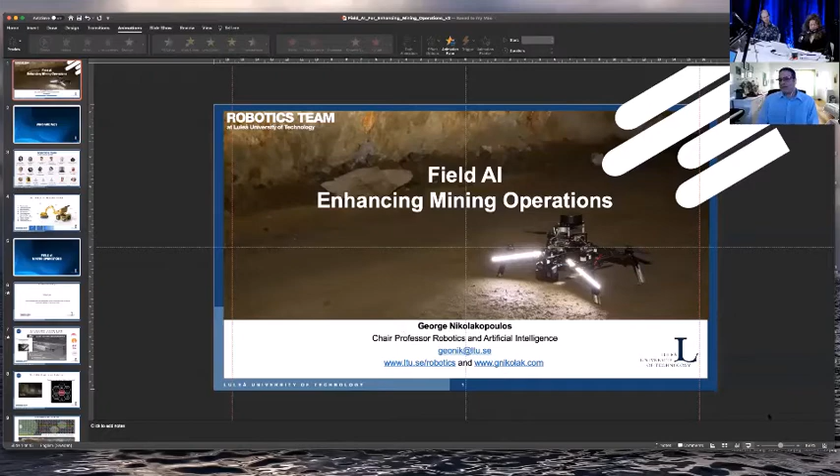Our next speaker is George Nikolakopoulos from Luleå University of Technology. Professor George Nikolakopoulos is the chair of Robotics and Artificial Intelligence at Luleå University of Technology, leading a team of 22 people, all focusing on autonomous robots. His team participates in the DARPA Sub-T Challenge with the JPL NASA team CoSTAR, and in 2020 they won the second stage of this worldwide prestigious competition. The title of George's talk is Field AI Enhancing Mining Operations.

So welcome, George. Thank you. Can you hear me? Can you see me? Can you see my presentation? Yeah, yes, okay. So I am Robot George, to couple my presentation to the previous one. Thank you for the introduction.

So I will jump immediately to the subject. We are a bunch of people, I think we became 23, all working in the area of field robotics, as we say. So what we are trying to do here is to take the robots from the lab and place them in real operating conditions, for example, in a mine, a construction site, in space.

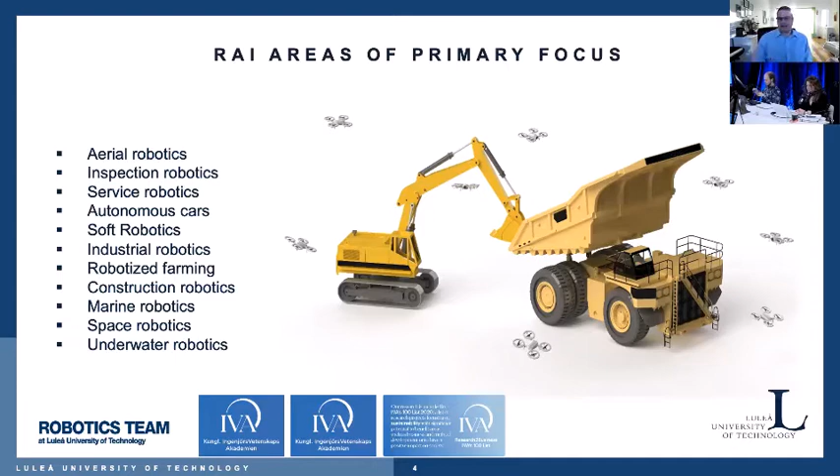So we are focusing on almost all the aspects of robots that have to do with infrastructure, with human activities, with classical examples being aerial robotics, autonomous cars, soft robotics, space robotics, underwater robotics, just to name a few. And because we are operating at high TRL levels, because as I said, we want to place our robots outside the laboratory in the real field, we have been listed three times in a row by IVA, based on our autonomy technology for drones, as among the most influencing technologies, I think, at the national level in Sweden.

Except from that, now I will start talking about AI, field AI, as I usually say, in mining operations. And I will present in short some of our activities over the last decade, almost.

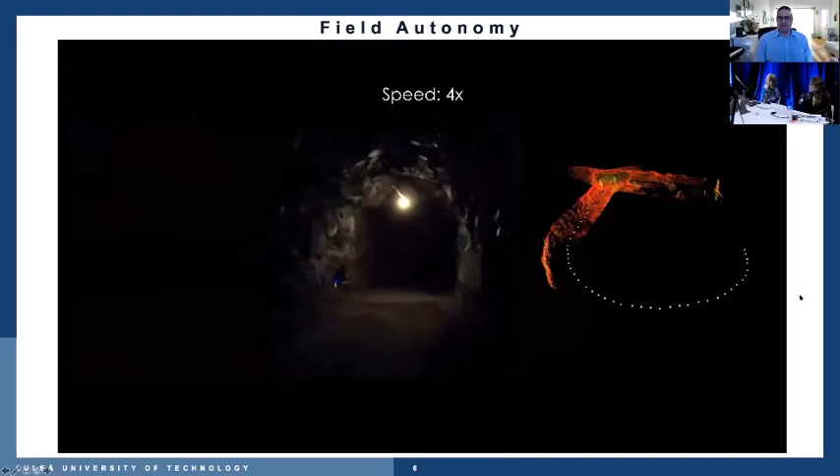Okay, I started working with the field of drones maybe 15 years ago. Now it is a very common subject, but yes, I think many of you have seen videos from me or from other scientists or engineers. Many mining companies are also hiring services like the one that you see.

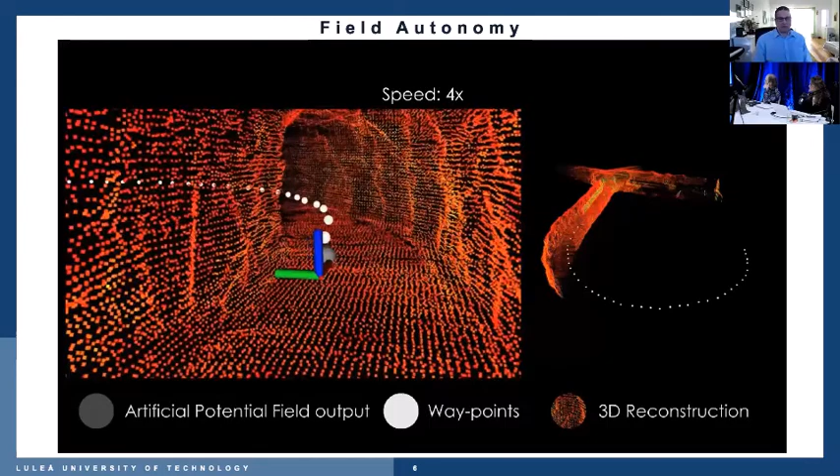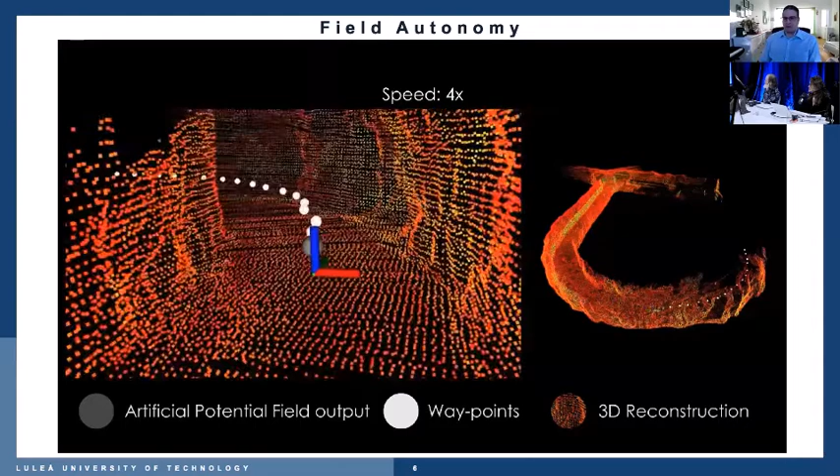So here I'm showing a fully autonomous drone operating in a mine exploration or tunnel exploration mission, where you see that the robot decides itself where to fly, how to avoid the walls, how to create the 3D reconstruction of the environment. So this is where the AI is hidden. The fact that it's an aerial vehicle doesn't matter in this case - the AI that I'm talking about is platform agnostic. So in this case, it's applied to an aerial vehicle.

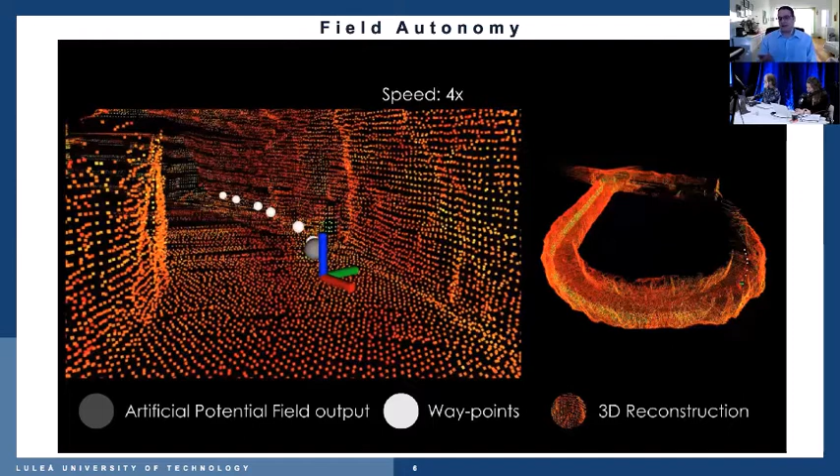It's more difficult to control a vehicle like that than a mining machine, for example. The size might confuse us—we think that because it's larger, it's more difficult to control, but fortunately it's not like this. With drones, we're doing a lot of work to demonstrate how capable our technologies are, working on an aerial platform that is inherently unstable. It means if something goes wrong, it will fall down. It will work for ground vehicles as well.

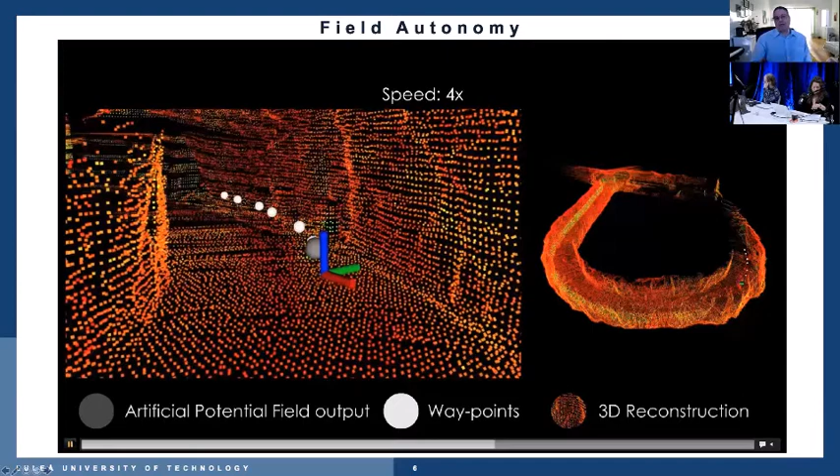This is an example of embedding AI in the device. You don't see the AI there—you see only the outcome. All the perception of the environment, the reasoning, the learning are mathematics embedded on the machine. So this is a scenario where the drone or vehicle is fully autonomously navigating through a bunch of obstacles and goes through them to continue the mission.

This is something we call reactive navigation. It means we embed in the machines the proper AI to understand the environment and take decisions in cases that have not been programmed before. So if you have a fully autonomous carrying line with wheel loaders, for example, and something happens, the robot needs the proper AI to do the proper reconfiguration. This is the classical focus in robotics over the last years.

Now I will start showing you the future, what the robotic community is working on. As mentioned in my introduction, we are participating in the DARPA Subterranean Challenge, which we won last year—we won the second phase. The last phase is coming in September, so let's see what will happen. This challenge is changing the way robots are penetrating human society, every 10 years. The last DARPA challenge was about autonomous cars.

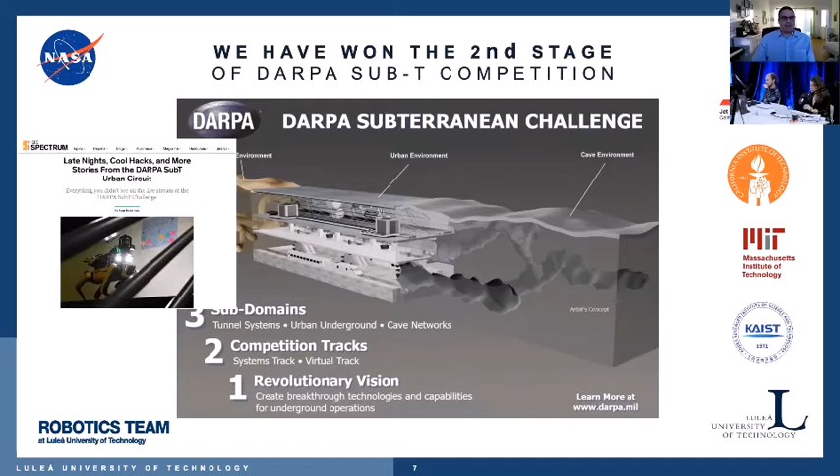What we're developing here is Nebula, the Nebula autonomy. We pass from classical development of algorithms, for example for navigation, to a more integrated approach. For this scenario, we're focusing not on the autonomy of each robot, but building multiple components to orchestrate the operation of multiple robots.

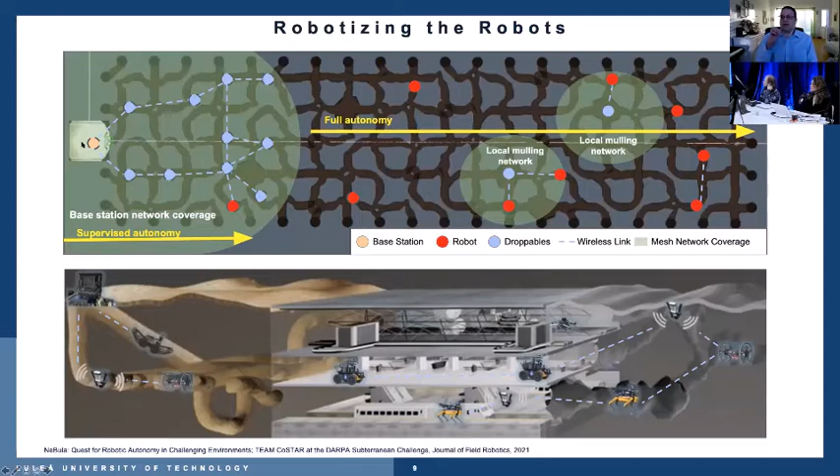I'm showing you some concepts we recently published in the Journal of Field Robotics. You see a mining environment with tunnels, and robots thrown inside at the same time to perform the exploration task while being controlled. When I say controlled, I mean high level—you just give a mission, and then the robots reconfigure their scenario, their mission, and their response.

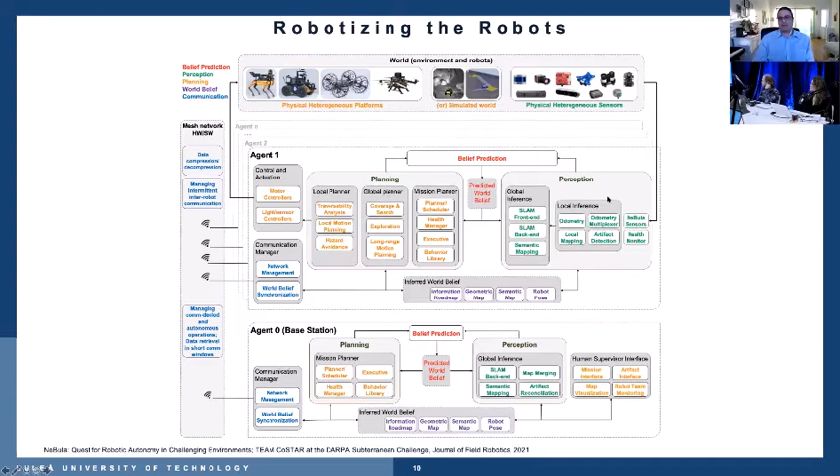What we're developing now, borrowing architecture we use in the NASA team, is that instead of focusing only on one block—like local motion planning or perception for one module—we build an AI software architecture with extreme capabilities to push vehicles, any kind, ground or aerial, to levels of autonomy, perception, and decision never reached before. This picture shows the complexity of all these components that need to work together, and we're doing this not for one agent, but for multiple agents. Here you see an example of reactive navigation, as I was saying before.

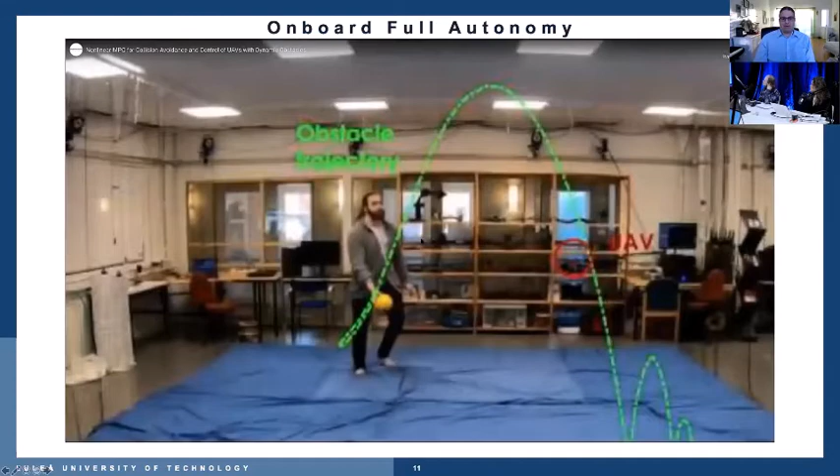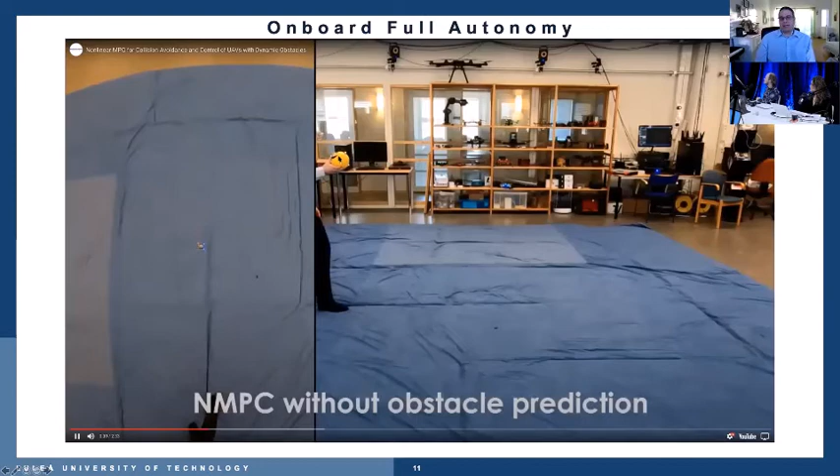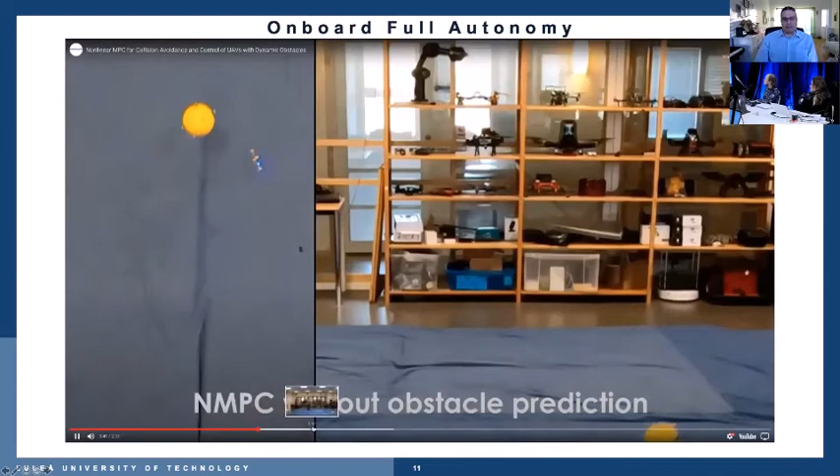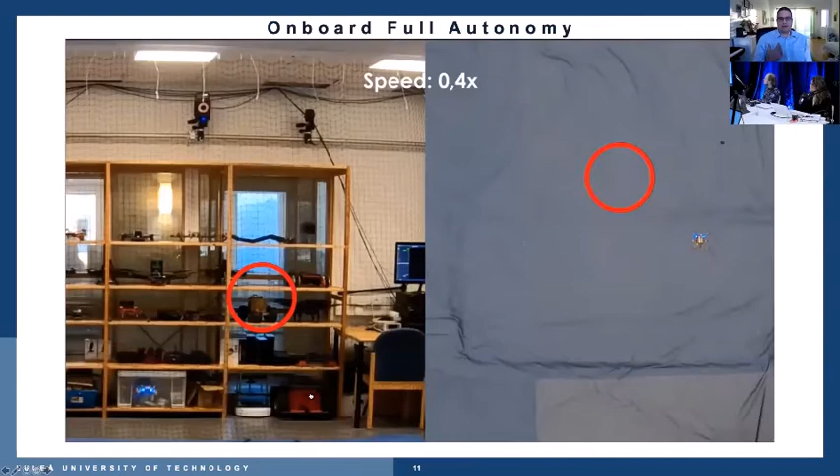The classical approach is that if somebody is throwing the ball, based on for example artificial potential fields, a method to detect obstacles, the robot is not capable to predict where the ball will go and if it will hit it. But if we add components of AI on top of that, the robot will have the capacity to start predicting where the ball is going and take immediate action before the ball hits it. So this is all about reactive navigation.

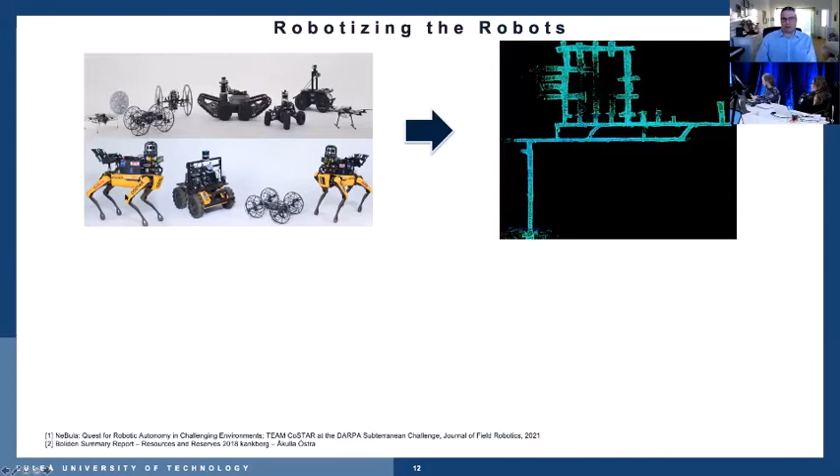The robot takes decisions before the event happens. What we are doing, and what we will see in the next years, is the results of the Subterranean challenge from multiple robots. In our team we have two Spots from Boston Dynamics, one Husky, and one Rollocopter, operating in environments that look like mining tunnels. This is equivalent to having multiple mining machines, and many actions now are focusing on automating the mining machine in similar mining environments. I'm borrowing these two images from a report from Boliden.

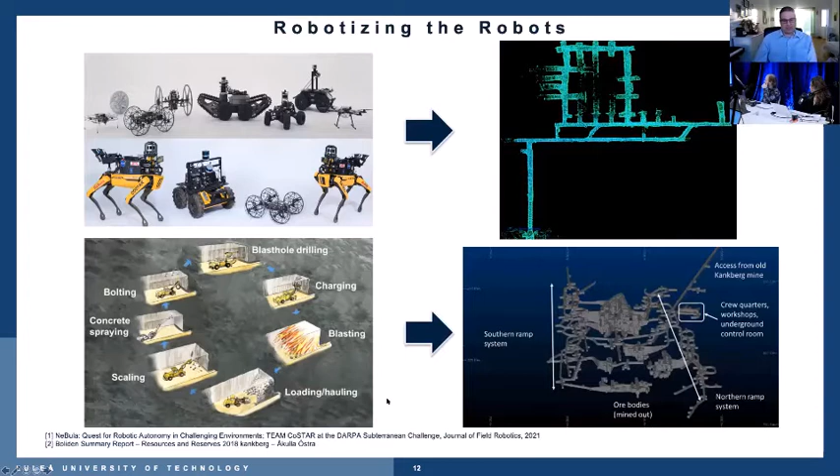So this is the future in mining. I want to give you an example, and I'll finish my presentation in 1-2 minutes. This is an example from the competition where we have multiple robots doing, for example, drifting or a 3D detailed scanning of the environment. Then we use some mathematics, AI as it's called nowadays, to do this stitching of the infrastructure together. It's an amazing result that gives other dimensions in autonomy in mining.

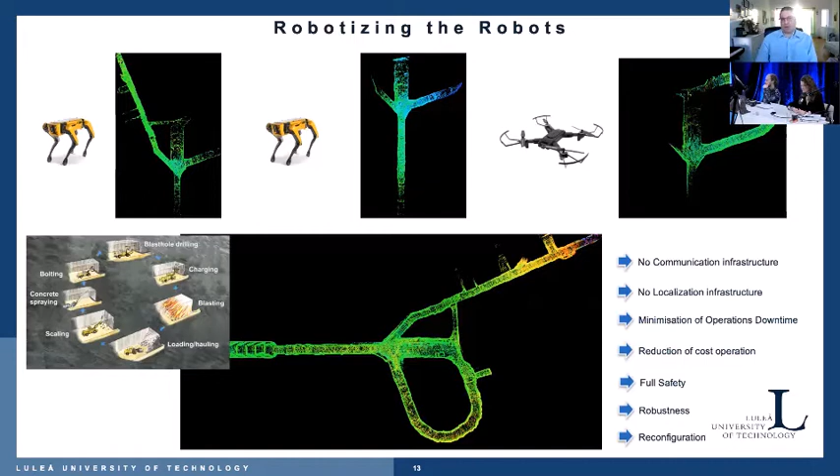You should always remember this setup, because this is the next step. All this technology can lead to applying robots in situations where we don't need any more communication infrastructure as we're doing now. We don't need any localization infrastructure as we're doing now. The robots can operate in unstructured, unknown environments. We have the tools to minimize operating downtimes, increase productivity, reduce costs, and we're talking about fully safe operations with robustness and reconfiguration in unexpected, unknown situations.

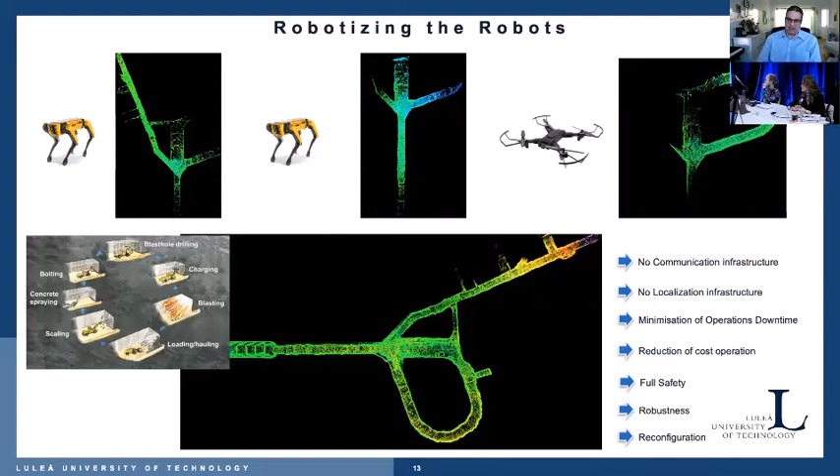That's the last slide. It's about creating a virtual mine - not graphics, not AR or VR, but a mining environment that can be a full test bed for deploying these robots and doing very realistic scenarios. I'm over time, so I will finish here.

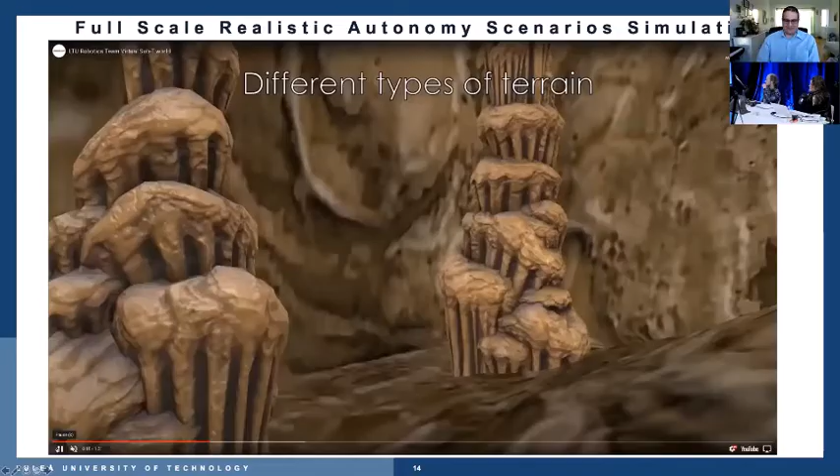I think my slides will be also shared with you. Sorry about that. Yes. But you will also be with us at the panel discussion at the end. Yeah, great. Yes.

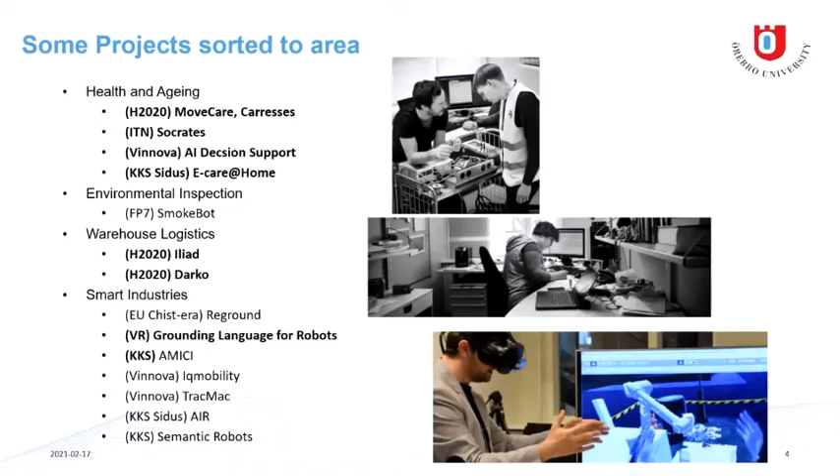If I would somehow characterize our collaboration, it's that we've had several years of experience moving from what we call basic research to application and then really testing it. So we really like collaborating with different actors, both in our region, in our nation, but also very much around the world. I want to lift how we work, because for those of you who maybe feel a bit unsure about what's happening AI-wise in Sweden, there is in fact an ecosystem in Sweden regarding AI. We have WASP, which is the Wallenberg initiative that is focusing a lot on basic research.

We heard from Daniel earlier today about implementation and how you can actually apply AI. We also have a lot of initiatives around education, like AI competence, looking at lifelong learning, and we try to mirror that ecosystem. So if you're interested in working on AI projects, contact the university and we can link you to what's happening nationwide. So let's go to some concrete projects.

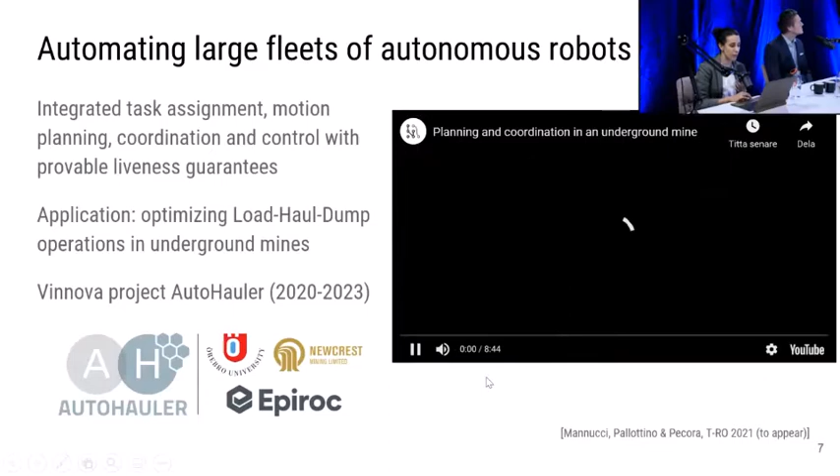This is one particular project that's not so unsimilar from something George mentioned earlier, being driven by two of our researchers, Dr. Pecora and his postdoc, who are looking at not only the individual autonomous system or robot, but how a fleet of autonomous robots can coordinate their actions.

You can look again at this video, basically showing a simulation of coordinating actions between 20 different robots. But these kinds of algorithms are taken forth very much in collaboration with our industrial partners, Epiroc. And in fact, when I came here, Ulla said, hey, that's my video. And that's really good, because that's what we want to do. I think this particular collaboration led to more opportunities for Epiroc.

And there is a company here called Newcrest Mining Limited, an Australian company that was very much attracted to Sweden because of the work done by the researchers.

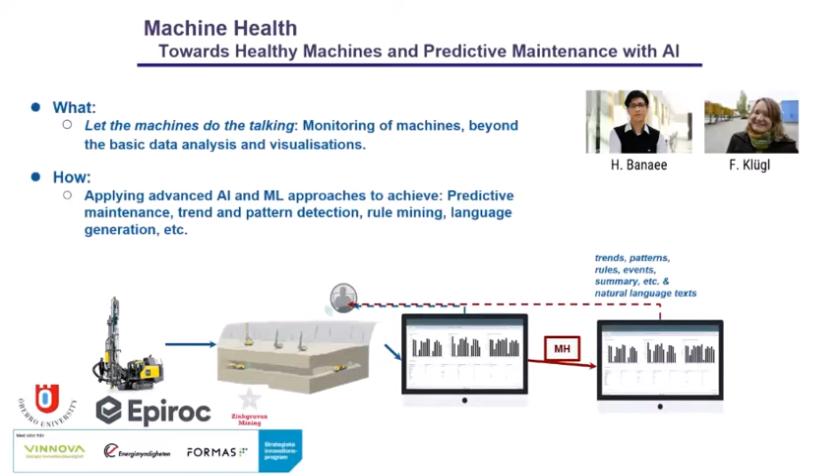Moving on, we talked a lot about robots, but we also look at cases where we don't have robots. This is a project looking at predictive maintenance and monitoring a lot of data. We have a lot of tools to visualize data, but Frederick talked about natural language, and one of the things we looked at was whether we can get an AI to explain very complicated trends in simple natural language by looking at monitoring tools provided by Epiroc, revealing patterns that might not be seen by the naked human eye.

And this is also very good for their customers like Zinkgruvan Mining, who may look at this and then realize how they need to improve the usage of the actual machines.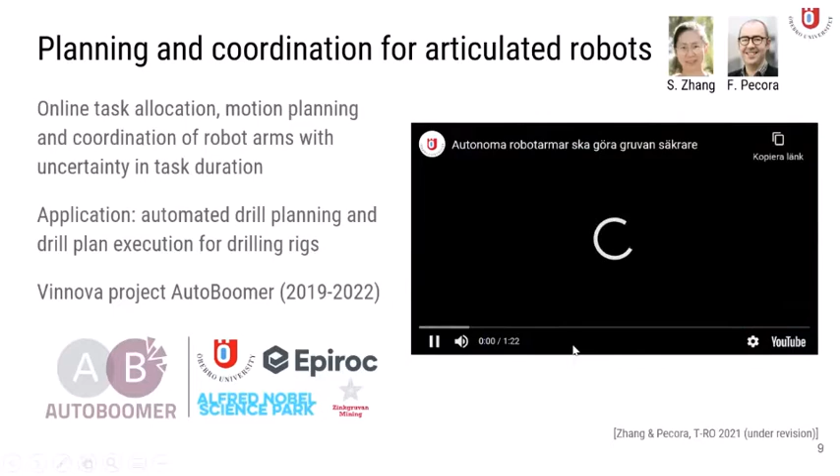Switch off the sound here. You can read hopefully the subtitles.

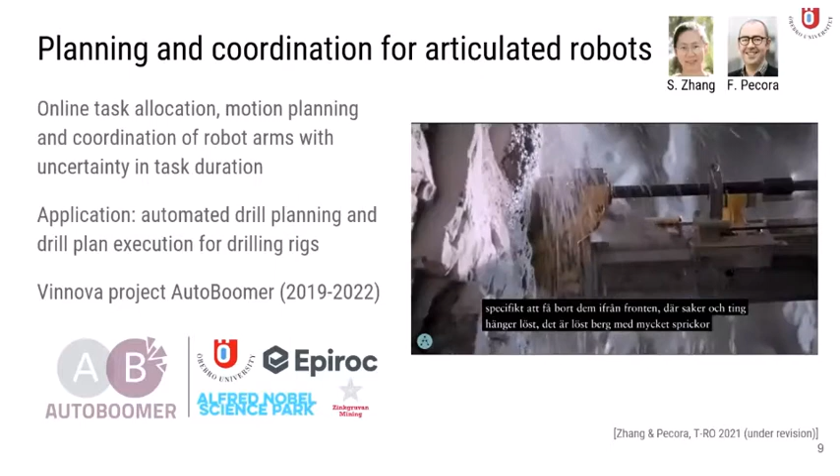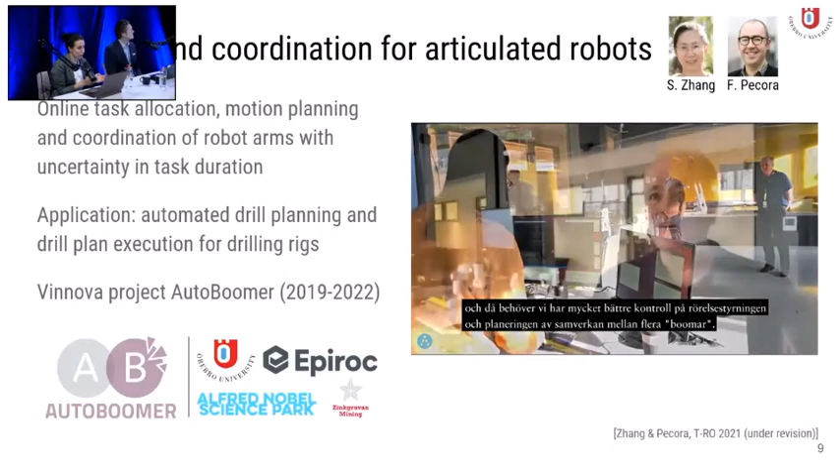What I want to lift here is that this is a particular case where one had the idea of coordinating different robot arms. So here you have different robot arms that should coordinate their actions between them.

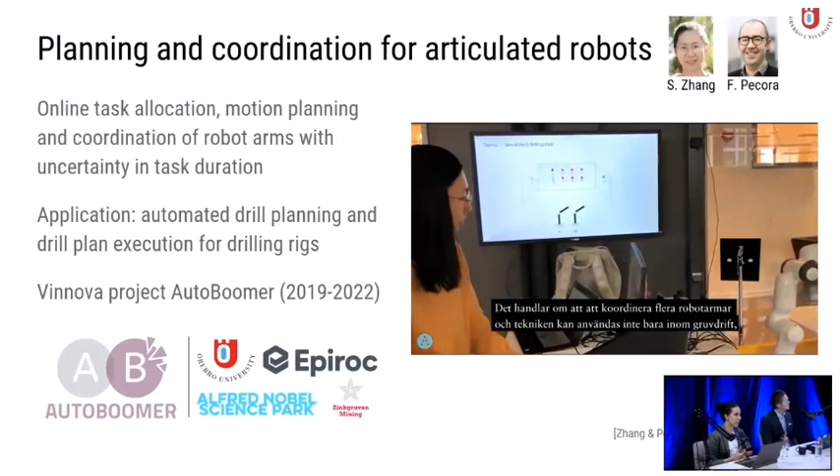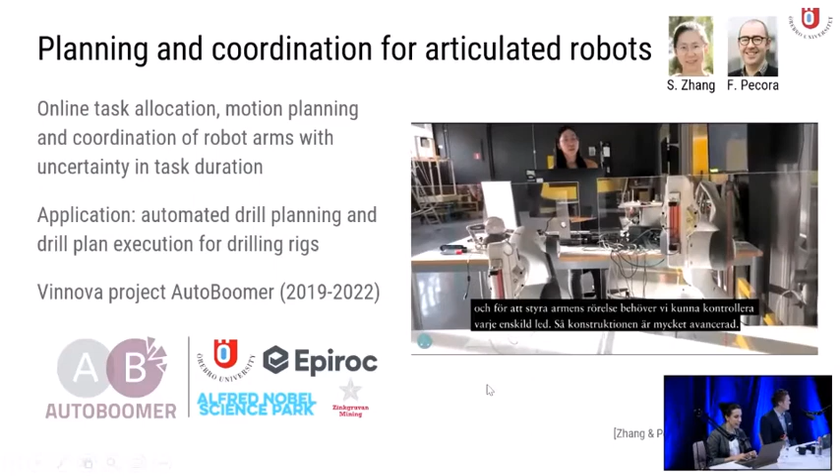But again, what I want to lift is that we have these labs and demonstrator environments at the university where we test our solutions together with the companies and researchers. So we want to move away slowly from these lab environments to the real environment, but these environments are very important for taking those steps. And again, this is a research project also led by Dr. Pecora.

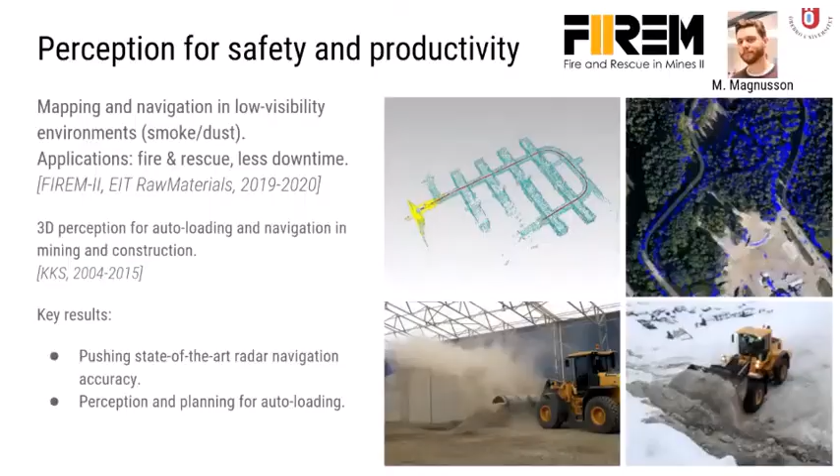Then we have a very interesting area dealing more on the side of perception. How do we measure information inside a mining environment? One specialty we have in our research center is perception, in particular perception when you have very low visibility environments. We also have researchers looking at perception of different types of entities, not just visual entities, but gas, for example. There's been a number of projects examining how you can increase the perceptual abilities of these autonomous systems.

And here we've had one researcher who's worked together with several others, Martin Magnusson, who's looked at examples of how you can create a good representation of the environment, even though you have low visibility.

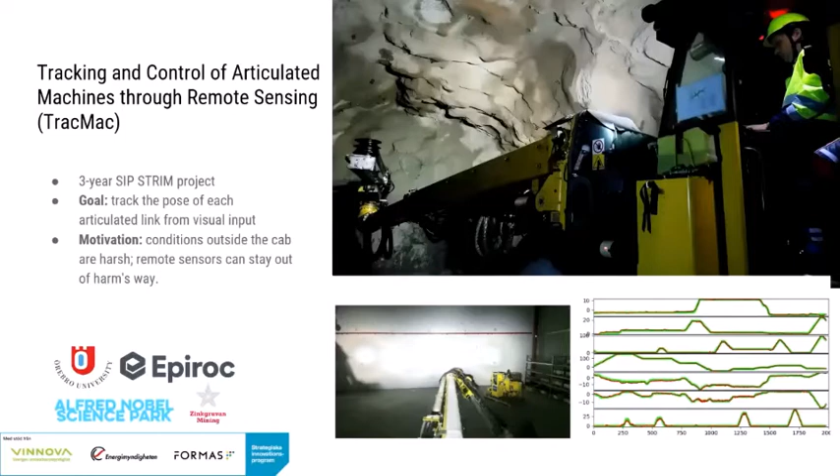And this last one, again, I just want to tease your appetite somewhat. This particular project, led by Dr. Stoyanov at the university, looks at how you can use sensors to track the pose of these articulated links that you have, for example, on these larger machines, and then give information to the operator or plan certain tasks so that you keep the operator as safe as possible.

As I said before, developing AI and robotics that work with and for humans is something we really want to push, and we want to do this very much in collaboration with as many people as possible. So my last message is that if you're curious about what AI can do, what autonomous systems can do in the mining field, you're welcome to reach out to us.

We have many ways into the university, and Lotta, you're one of them. Yeah, we're really happy to be part of the Swedish Mining Innovation and have a look at how we can transfer the knowledge that's being produced here. Thank you. Great, thank you.

Here we can see the technical development in chronological order at LKAB with respect to automation. Around the 1950s, the haulage went automated. Then the train haulage went automated. Then we turned to remote control the rail switches for the railway system in the mine. Then automated trains around the 1970s. At the end of the 1970s, we had the first fully controlled pelletization plant.

Then during the 1990s, a system for real-time information was introduced to monitor and collect data from the mine and the plants. At the end of the 1990s, LKAB tried a fully automated loading system. Then we introduced remote control rock breakers in production areas.

In the decade of 2010-2020, an extensive wireless network was introduced in the mines, both Kiruna mine and Malmberget mine, with more than 3,700 Wi-Fi access points. That means both entire mines had Wi-Fi access. Then the engineers could gather data, inspect areas when the machines were in operation, and assess in real time cases related to production and other operations in the mines.

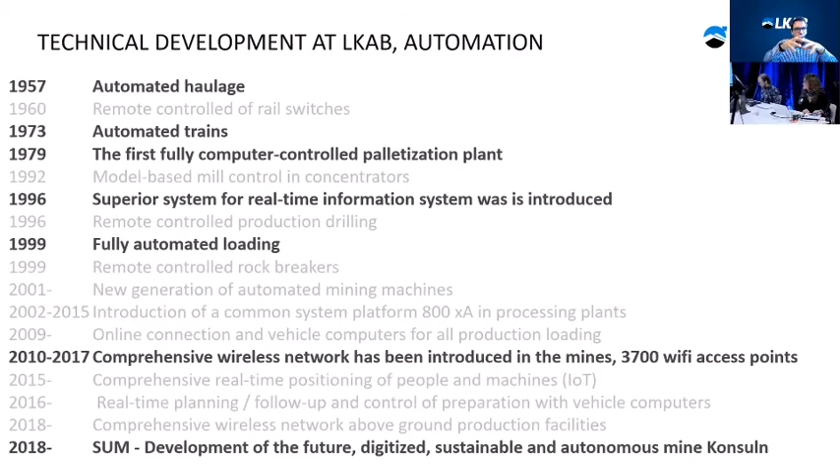Today's practices are much safer and much higher efficiency. We use much safer and more efficient equipment, and the work changed from heavily manual work into heavily mechanized work. Our operators are located in safe locations, with remote control machines.

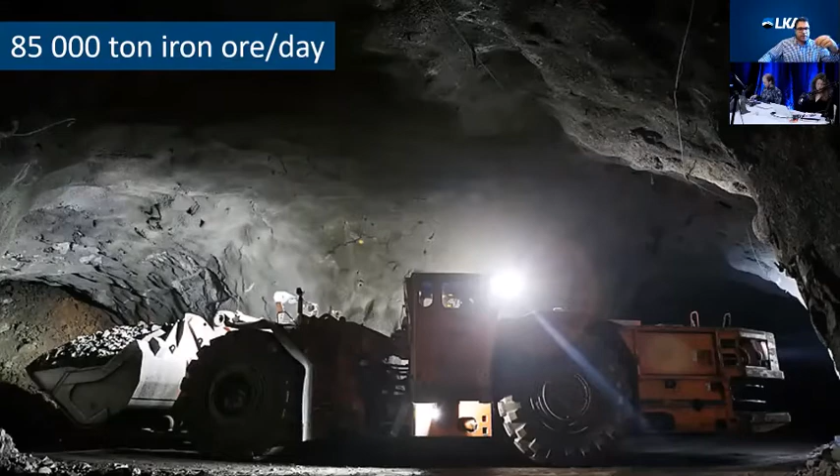Drilling machines, for example, as we can see in this picture, and also some machines used for production - the loaders. If you compare that machine with the previous one, it's much safer and bigger, giving higher productivity, and the cross-cut areas and the mine grow larger. Today our production is 85,000 tons of iron ore per day. The final product, the steel that is produced, is equivalent to 3 Eiffel Towers a day.

Then tomorrow - the concepts of tomorrow, of course, AI is involved, together with AI, data, and automation. That means we have 3 cores of digitalization. First is to inspect, to gather information about the existing conditions in the mines, then to plan, and then to give the order to the machine to perform a task. Of course, all these pillars exchange information with each other, and advanced, sophisticated algorithms can learn and optimize the process, making it safer and more efficient.

Here, the inspection can be done by means of various vehicles, aerial or ground vehicles—for example, fully automated drones or ground robots. Spot can be one of them, or a combination of these two machines in areas where robots cannot go because of mud or water. Then the drone can be deployed to further investigate the area.

Here we can see the progress in the SUM project over the last 10 years and forth until 2030. At the beginning, we had isolated systems that didn't talk to each other. Then we jumped into connected operations, where we installed Wi-Fi points and started gathering data in real time. Then we went to integrated operations, where we could run remote diagnostics and see the condition of machines in real time. The way forward is remote control, remote operations, prescriptive maintenance and analytics, real-time information. So less and less people will be exposed to mining conditions, with intelligent systems and electric ships.

Finally, the vision is to have autonomous operations where systems will communicate with each other, exchange information, and take decisions for much safer and more efficient mining operations.

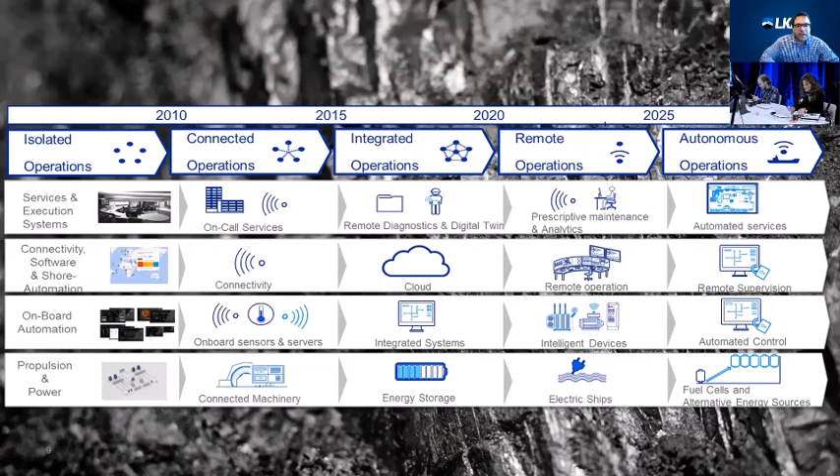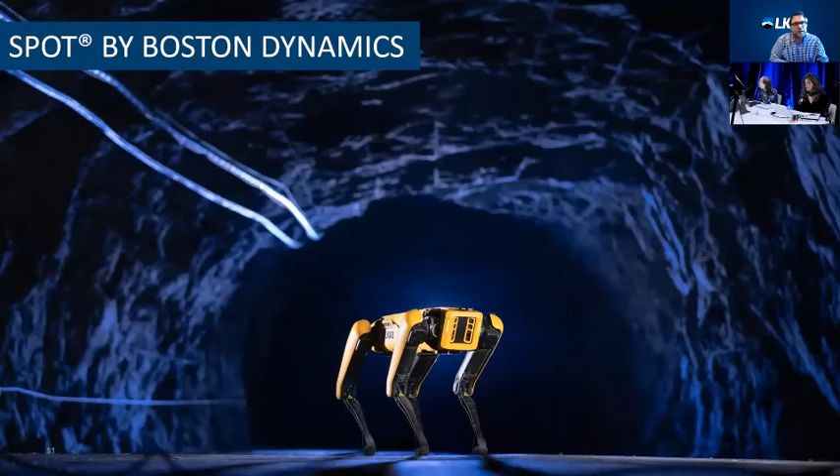Recently we have been working with Spot, a dog-like robot by Boston Dynamics. LKAB right now has two Spots for testing the suitability of these robots in mining conditions, because there is dust and humidity in the air, and we know electronics are a bit sensitive to these conditions.

These robots can be used for different purposes—for example, to inspect areas or scan areas after a production blast, to measure the gases of an area after a blast. In case of a fire, these robots can be equipped with a rescue payload, approach the area, and give engineers a real-time perspective of what's going on, so people can take decisions based on given information and not assumptions.

Spot by itself understands its surrounding environment and adapts to it. It understands if it's slippery, muddy, if there's water, and even if there's low light intensity, Spot can operate. Of course, Spot can be programmed to explore an area of the mine or perform a task during the quiet hours of the mine.

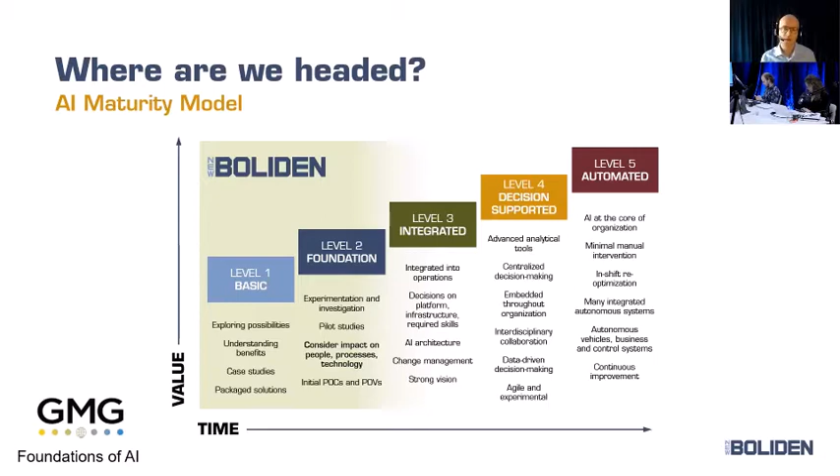We have also done quite a few case studies, sometimes with packaged solutions where a third party or supplier provided an AI solution for a specific application. These case studies involved some predictive maintenance, but one of the more successful studies was trying to predict disturbances in the process, where we showed we could predict disturbances up to two hours before they happen using AI technologies. This could be very beneficial, giving operators ample time to take preventive actions and hopefully avoid an accident or a discharge into the environment.

At level 2, the foundation stage, we see more experimentation and more thorough investigation into what needs to be done, along with pilot studies on real projects that will eventually become implementations — that's where we're doing a lot of work now, considering impact on people, processes, and technology. I was hoping to be able to check that box after this talk, because that's exactly what I'm doing right now, so maybe we could take this step here and now.

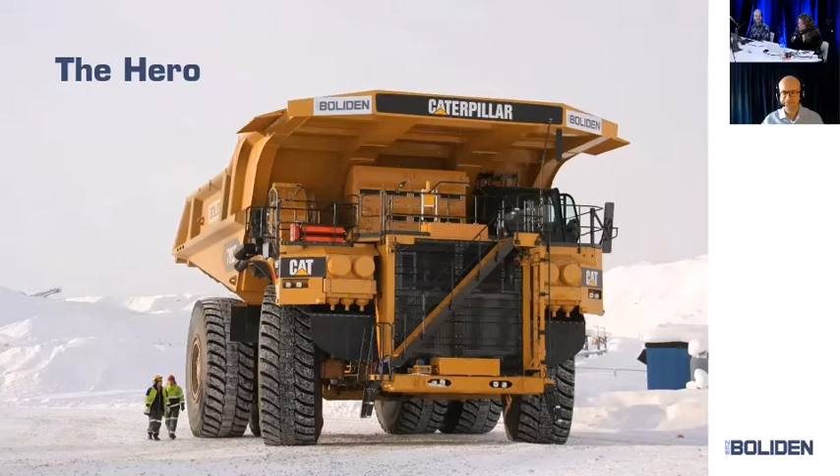Our next speakers are from the Chilean mining company Codelco. Leonardo Angelucci and Alberto Laudadio will be with us and tell us a little bit about how Codelco is seeing AI and a short summary of what they are doing today in this field.

Hi, hello. My name is Alberto Laudadio, and I'm glad to be part of this webinar. Thanks for having us. I'm data manager at the National Copper Corporation of Chile, as part of the advanced analytics team in the VP of Technology. I'm mainly in charge of our data lake and corporate data governance, working with the data architect and our team of data engineers and the data governance leader.

Here with me is Leonardo Angelucci, who is Agile Manager in the same Advanced Analytics team. Leonardo is in charge of the implementation of the Advanced Analytics Initiative and the Data Scientist teams. I'll be telling you about the purpose of our team and the key elements we rely on to achieve our goals. And Leonardo will be telling you about how we are doing the project and what are our next steps.

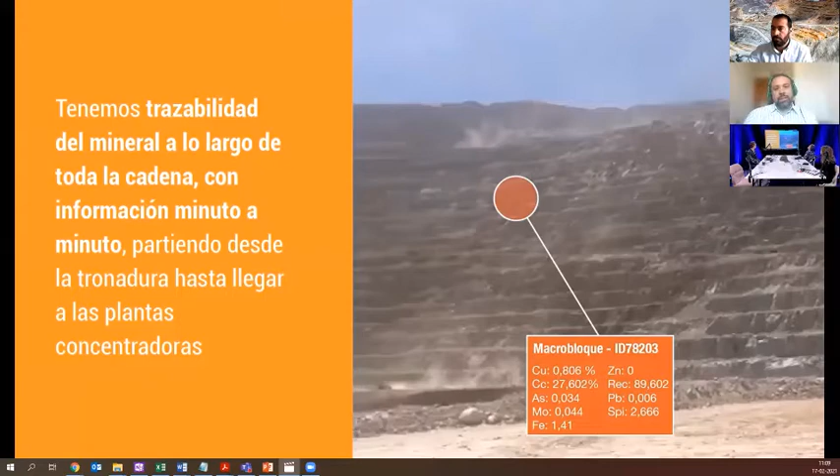The first project I want to mention is named MINCO, it's Mine to Concentrator in our Chuquicamata division. The scope is to maximize the copper output with one particularity: we are selecting the optimal mineral combination, which you may know as blend or blending. We do that with three different sources: the open pit in Chuquicamata, the underground mine in Chuquicamata, and mineral from another northern Codelco division named Radomiro Tomic.

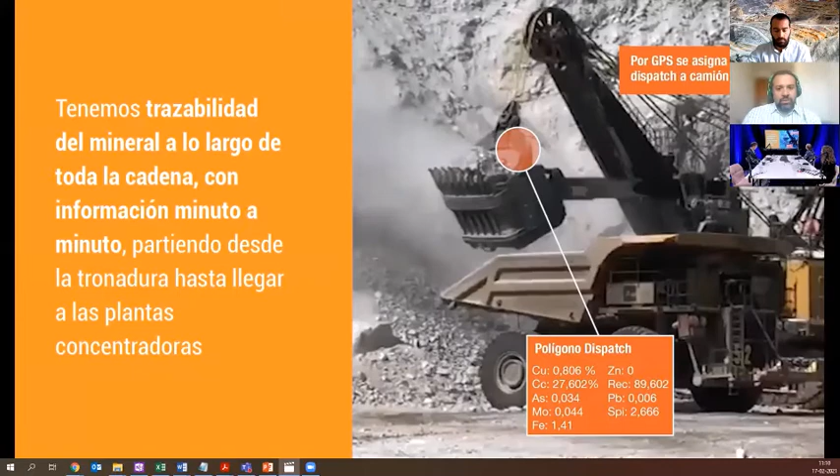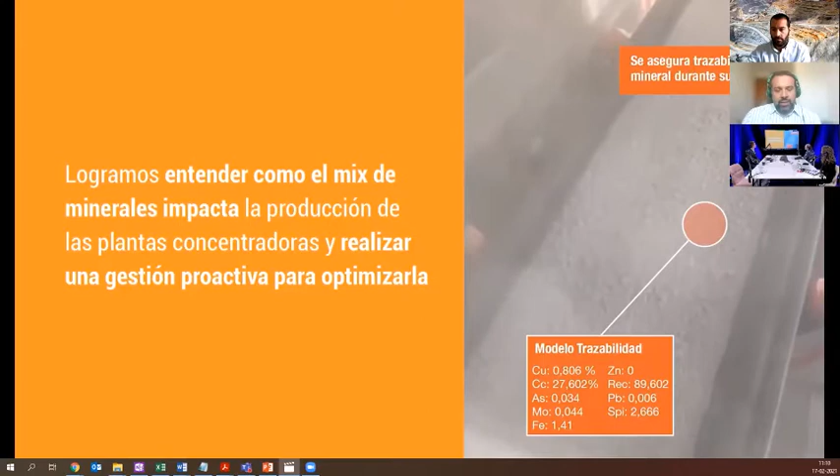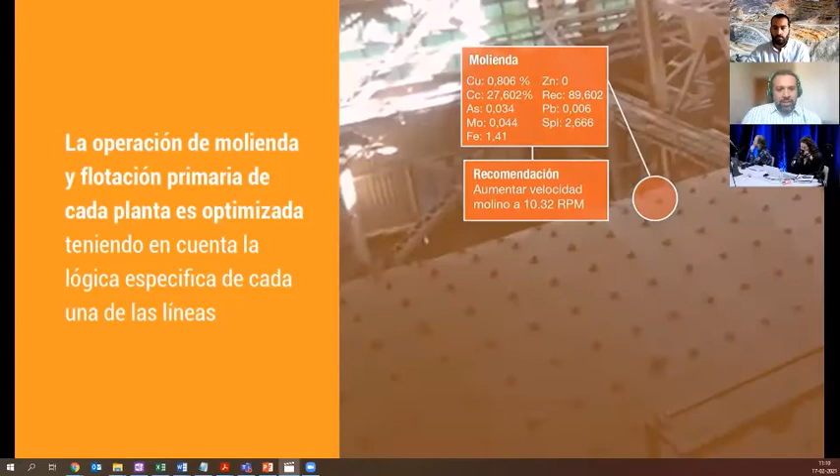We define this optimal combination based on the current division concentrator context and actual configuration. I mean we are talking about the line with the SAG mills, the grinding mills, the rougher flotation. Despite modeling each process separately, the main objective to maximize the copper output works as one big process coordinated between all these small pieces of our production line.

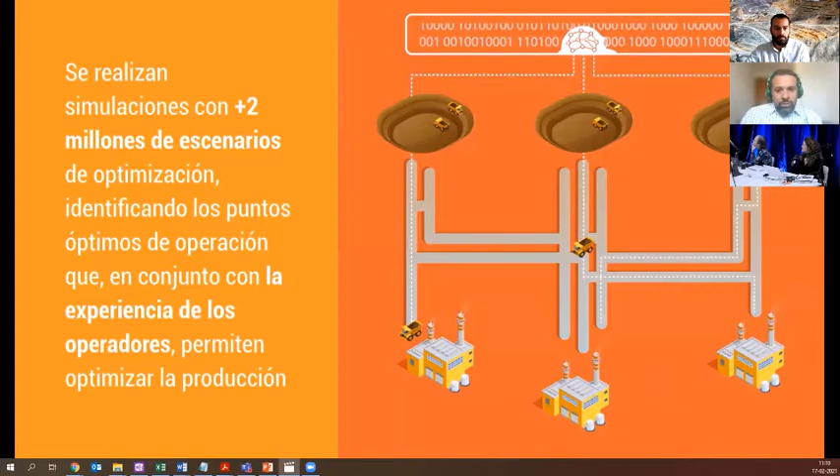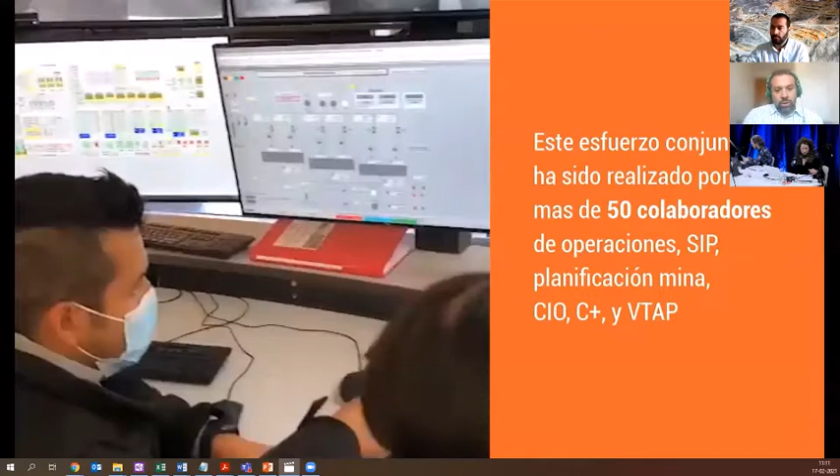What we do in concrete is create a recommendation system for the operators in the central control room, where the remote operation is, always with focus on giving the operator a few modifications in the control variable limits. This is our core in this project, all based in advanced analytics and machine learning models.

I want to give you a few highlights about this project. This is our top value project in our portfolio, and we expect a big value at the end of the road. The project execution is based on the Scrum Agile framework, and the continuous operation is based on a traditional Kanban framework, with defined stations, very traditional Kanban.

One very important thing to mention: we never work alone. We always work with the operational experts of the division. We have a mixed team; in fact, our product owner is a process expert in this project. As the analytics team, we provide the data scientist, the data engineer, the scrum master, the full stack developers—all the technical hands for the project.

Another highlight of the project is that it's 100% cloud-based. As Alberto said, we have data in near real time from the sensor tags. All of our machine learning models are executed in our cloud environment, and the recommendation system and KPI reports are mounted in the cloud too.

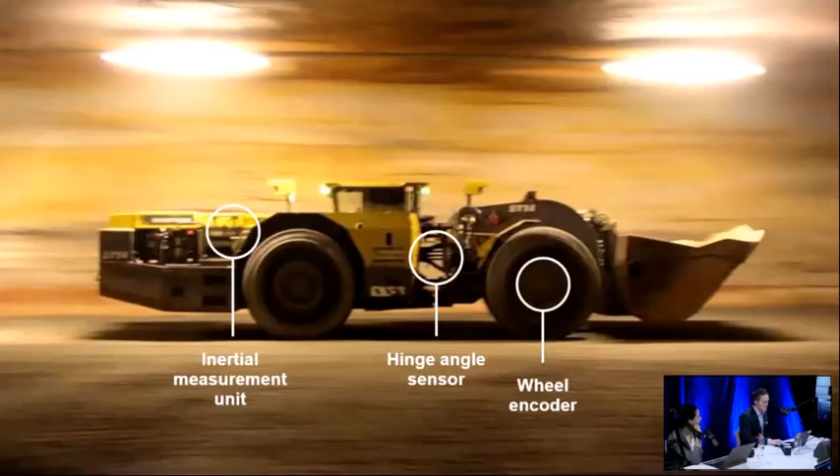So we need to add some sensors to it. We add a better wheel encoder, a better hinge angle encoder in order to know exactly how much we are turning. We're going pretty quickly in some cases, so we really need to keep track of where we are heading. We put on an IMU to get the acceleration in all directions. We need to see the walls, which are the main input to our navigation system when it comes to understanding where we are, because we build maps and compare what we see at every time, and that is our position estimate. And of course, everything is made in a brain—we add a computer for that. So this is how we add AI to a machine.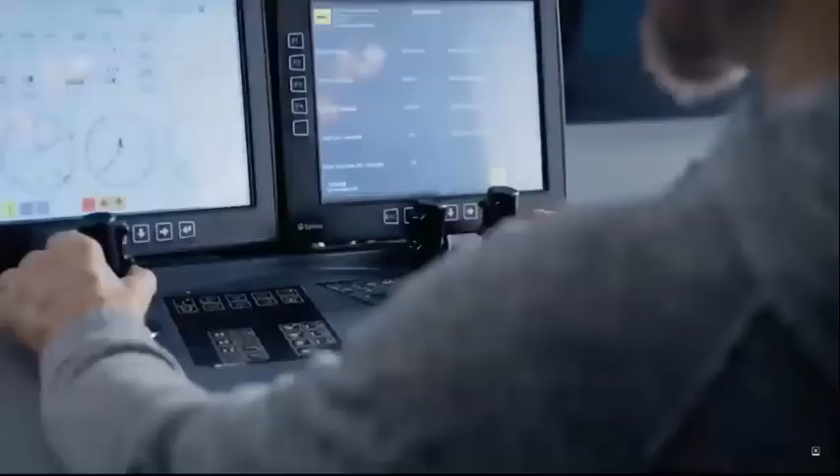So here we go. This is the control tower. The operators sit here in a cozy, warm and clean environment, and they send down missions to the machines operating in the mine. We can do fleet management from this level, and we can operate basically everything from there.

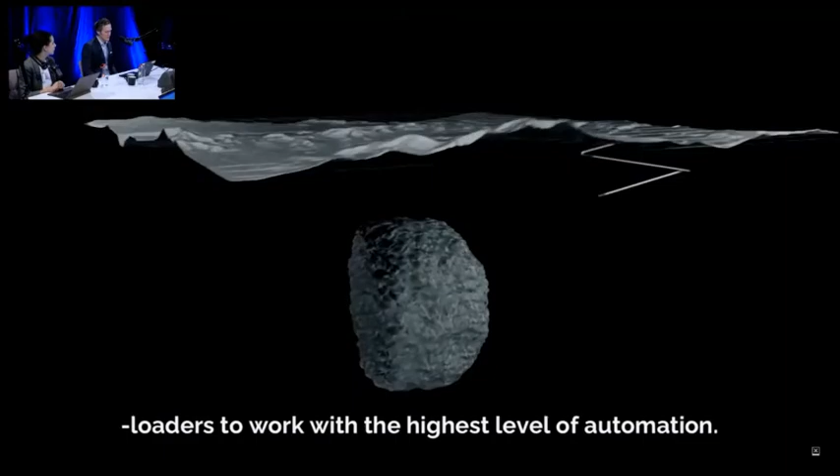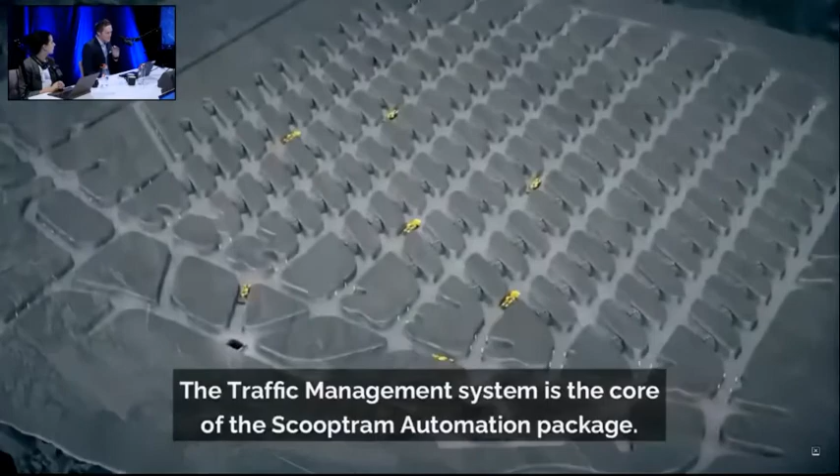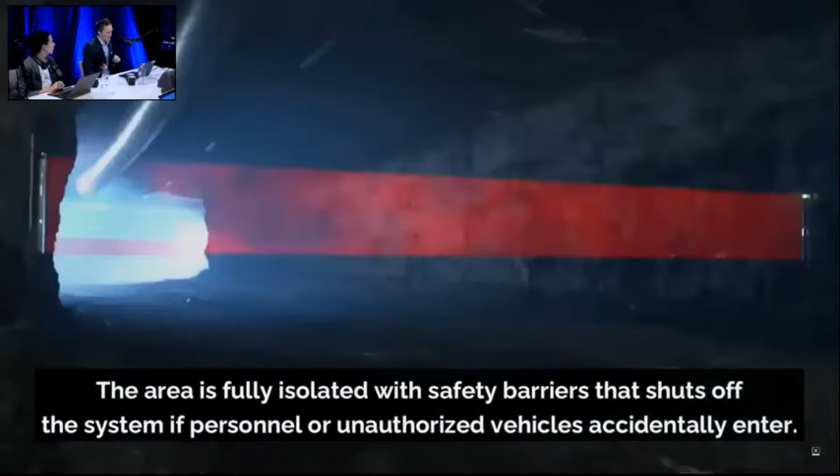This is a little illustration of block caving, a mining method particularly well suited for autonomous loader operations, but I will not speak about that because that is not my area at all. So beneath the big ore body, you have all our autonomous loaders—it's a little bit like ants going back and forward here. The idea is that there is no operator sitting in the cabin at all. Today we need to keep autonomous machines separated from people and machines with people inside them.

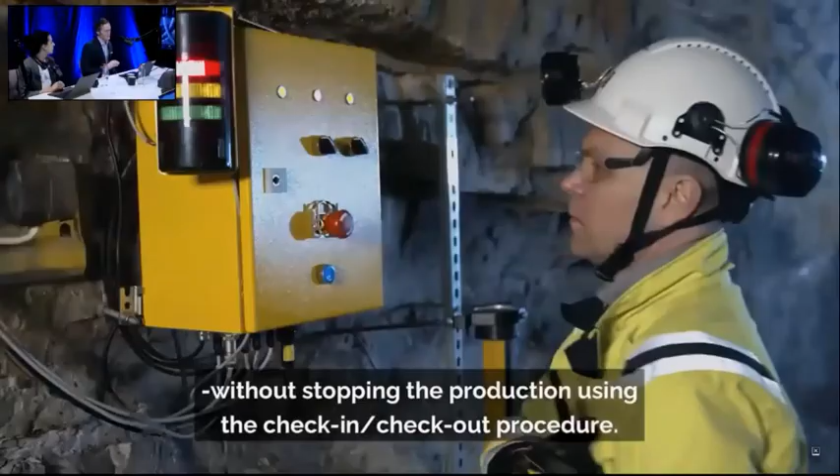So the idea is that we drive the machine to the secured area and put it inside the safety system. This is a laser curtain, and we stay inside this safe area, speak to the guys in the control tower, and then we can drive the machine into the autonomous area and let them do their job there. So this is the process. I think you saw in Amy's picture something very similar, because I think it is the same mining map.

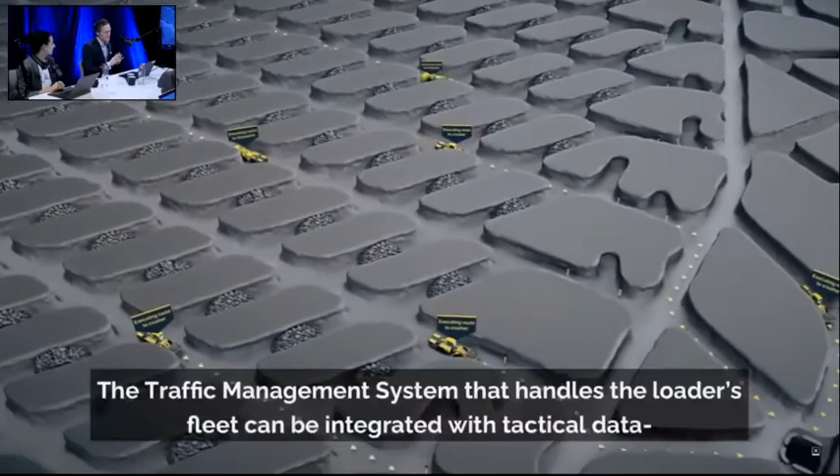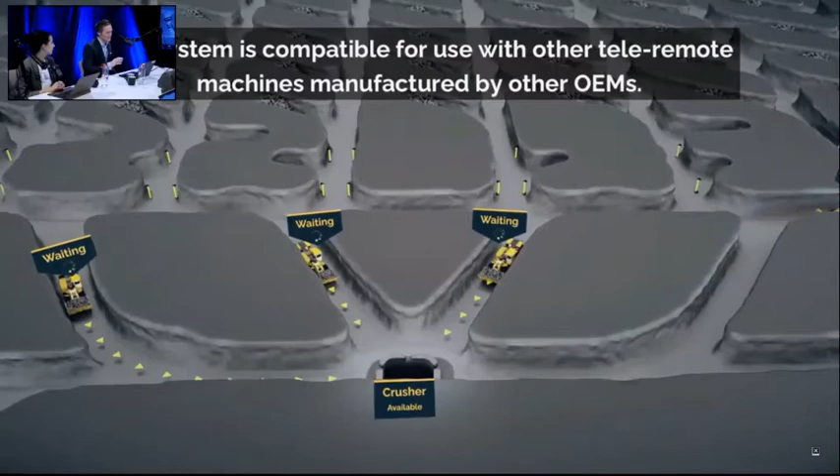So what we also do is put AI on the machine itself for proper navigation—they are not allowed to collide, they need to know where they are, and so on. But we also do fleet management and optimize the process in total. We plan for all these loaders, and the idea is to not wait, because that is bad. The idea is to work and fill material in the crusher and keep everything clean, tidy and working smoothly.

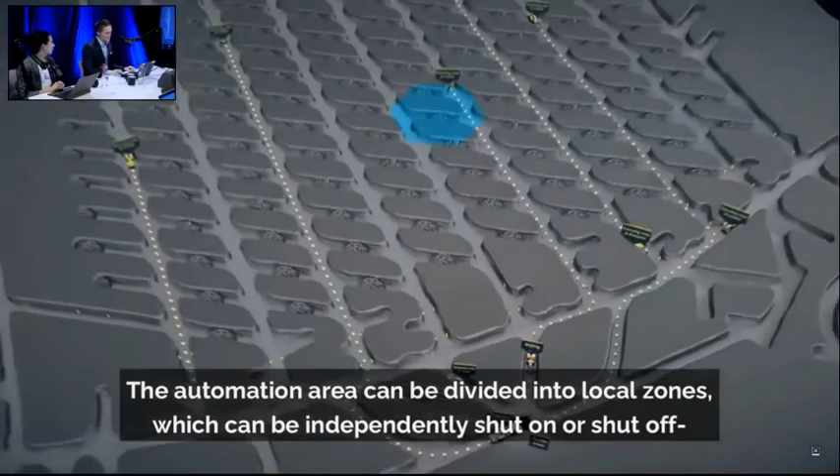So we do fleet management as well. So this is what we have today. If we move on a little bit, what are our future challenges when it comes to AI?

I would say that these AI challenges we have already today are a little bit more of a classic robotic problem and optimization problem. But I think for these two that I picked out now, maybe we need to go a bit even further and also bring in machine learning.

One thing that is problematic, and we have been working on for a while, is to fill the scoop automatically. As you saw in the previous film, we do navigation and dumping autonomously already today, but the remaining challenge is the autonomous loading.

When I looked in my folders yesterday to find a suitable picture for this, I found a folder named 2014. So this picture is actually quite old, the top one there. We did some experiments in Kvarntorp, and we thought we had solved the problem actually, but when we came to another pile with another material, it didn't work as good as we thought. So this is a real challenge actually.

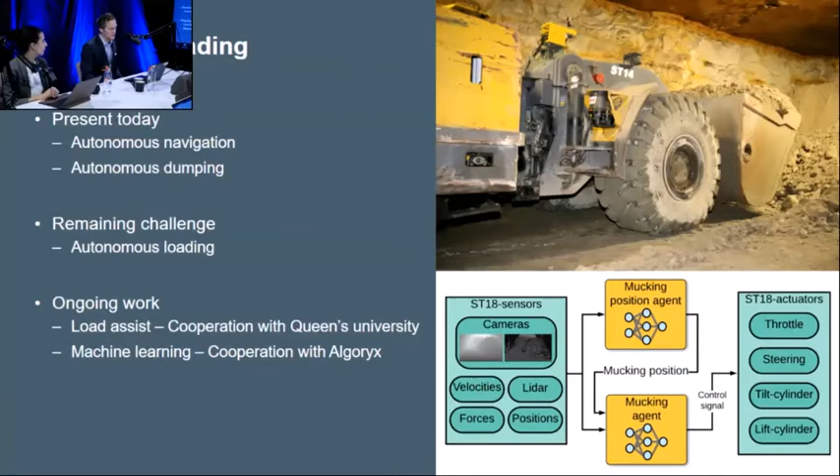We have also made a small project together with Algoryx, and they do machine learning totally in simulation, and we will see if that can help us out with this problem. So this is definitely a challenge.

Another thing I think we could spend some more time on is sometimes the walls move. We have seen some customers fill materials and then dig it away and put it somewhere else.

Again, we think we have a good solution on map creation. You can run your machine, create your maps. We can go super fast autonomously. The driving is robust and good.

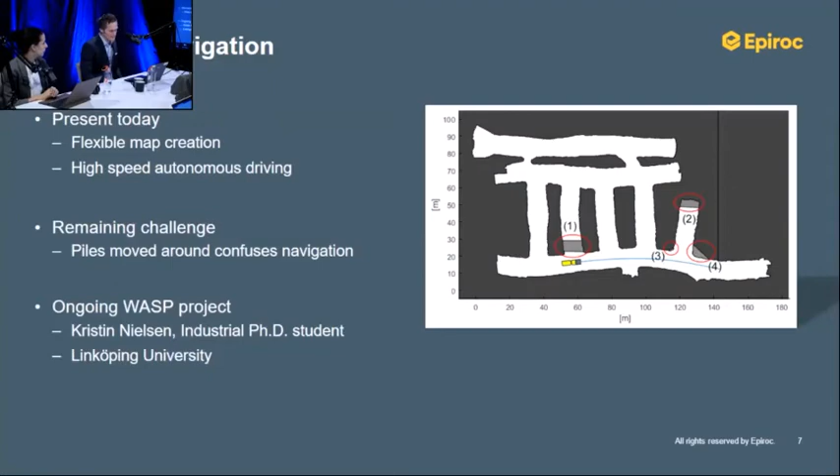But the challenge here is when the mine moves around these piles. Because, of course, if you make a map and there is a wall, and then the next time you come there is a drift instead, and the other way around, it's problematic. So here we need to come up with some even better algorithms for the mapping and navigation problem.

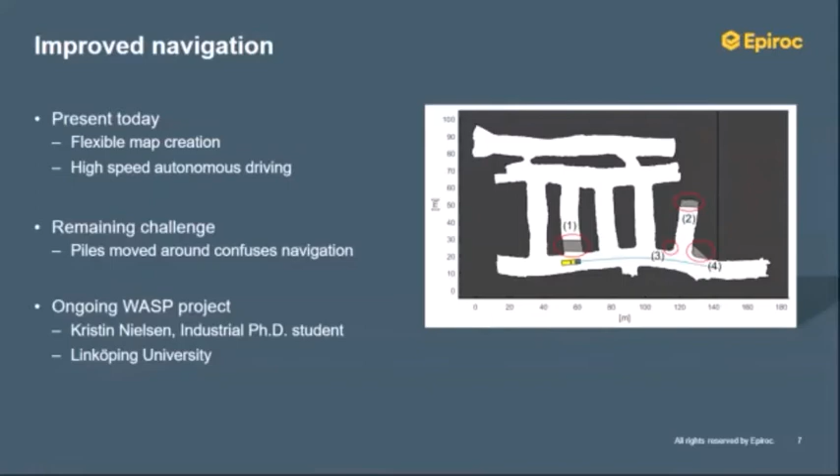So here we have another ongoing project. It's a WASP program project, as Amy mentioned, a big finance institution for that. Kristin Nielsen is our industrial PhD student, together with Linköping University, and she has addressed this particular problem.

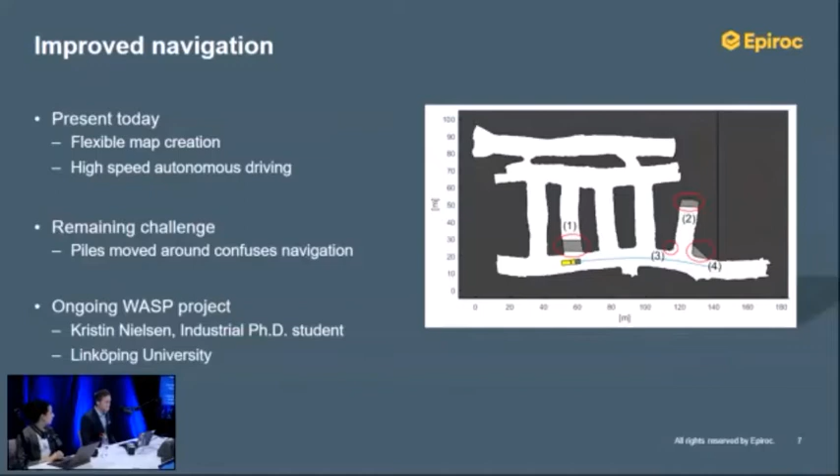So that is actually my presentation. It was kind of quick, I hope. Questions maybe.

I think maybe we'll take the questions for later, afterwards. In the panel. Yeah, because you will be with us in the panel as well. I will stay.